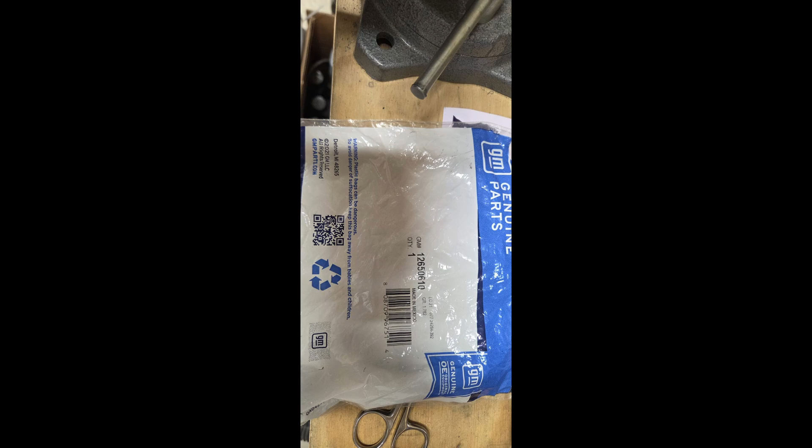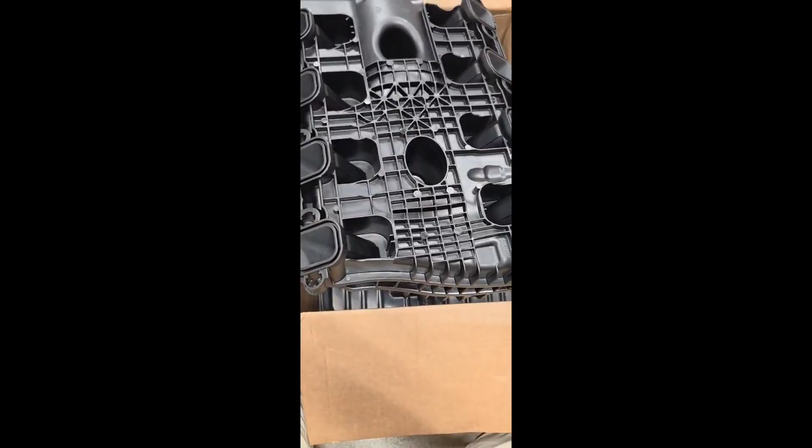The intake manifold. Looks good. I have a 2021 though, so hopefully it works out.

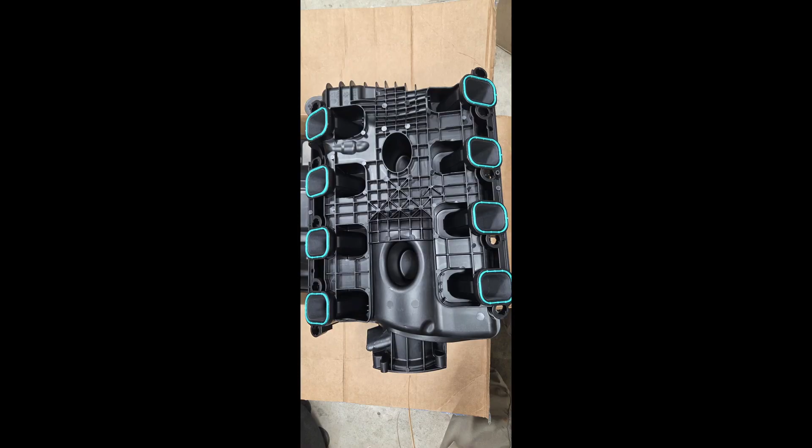Had a little unboxing video. I just hope it works.

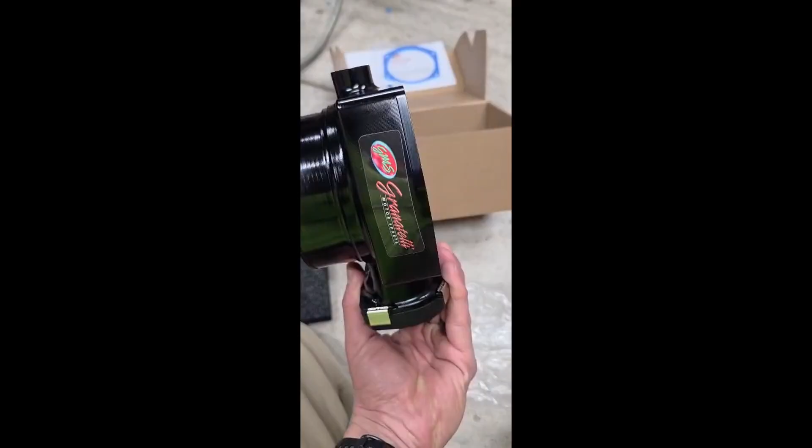Damn, look at this beast. I have a 2021 Silverado, but usually anything from 19 to 21 is usually compatible, but hopefully this is too. This thing is sick.

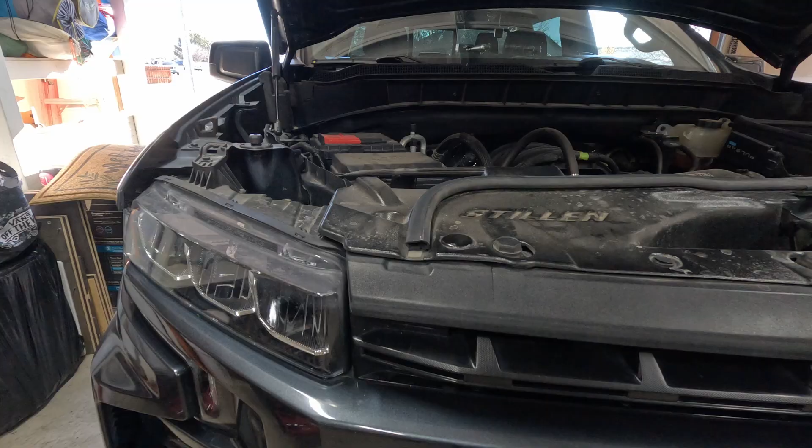But first things first, we're gonna remove the negative battery. Well, the negative terminal.

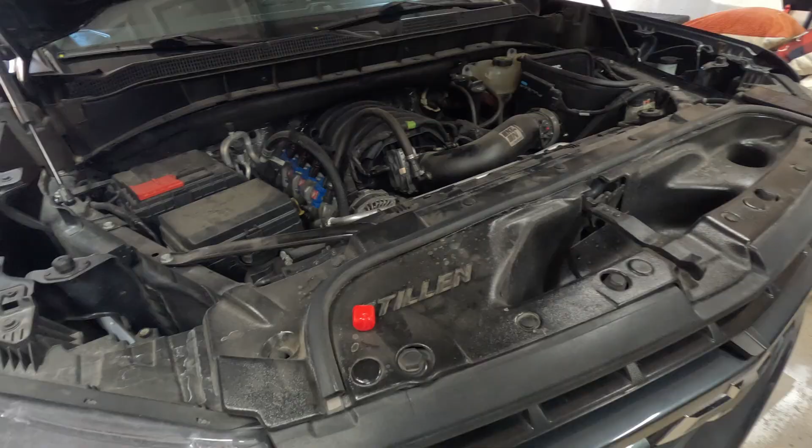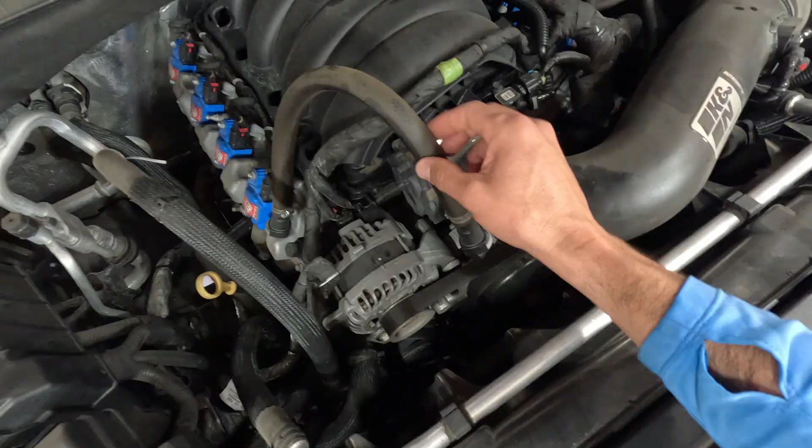Be a little tough to see, but next thing we're gonna do is start getting some of the intake stuff out of the way. So remove the throttle body, some of these hoses out of the way, start disconnecting these cords, another hose, vacuum line. And we get to the 10mm bolts that are in between that.

Alright, I'm just gonna try to get a little bit of shots before and after. Intake - I'm sorry, the throttle body. Connections on there. But it needs to be clean for sure.

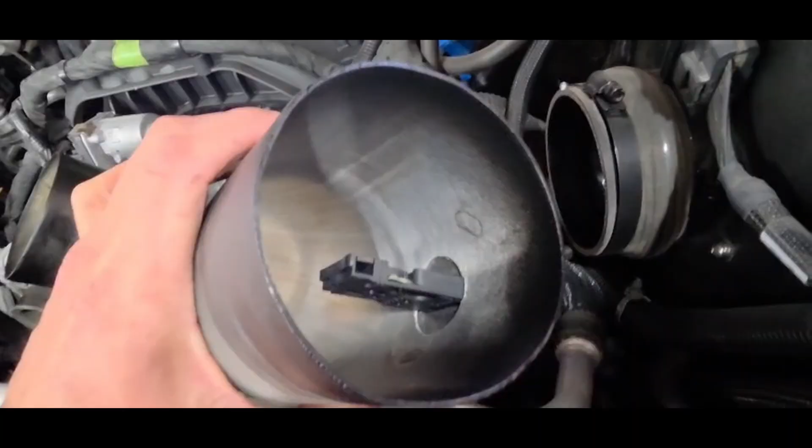Well, my GoPro died, so or the SD card is full. So while I have it apart, I'm actually gonna also spray the mass airflow sensor. It's been a while anyway, so I'm gonna spray that. Hopefully that can get cleaned up while we're here.

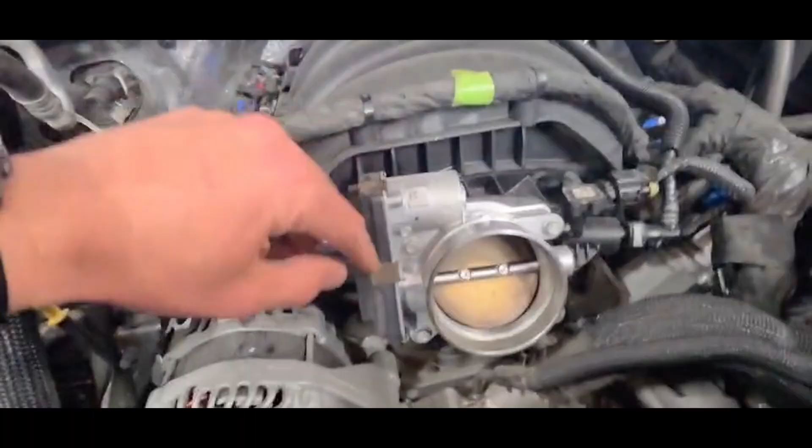I'm gonna start removing some of these plugs out of the way for right now. Then I'll do the throttle body, then get all these little T3 connections out of the way, all around that are holding all these wires to the cover, and then start trying to remove it.

Okay, now I also took off a bunch of these damn clips. Those things suck, especially in the back. See this side? These are a little worse. Trying to get all these. I know it's hard to see, but these are a pain in the ass. They got all messed up, so I'll probably just cut them off. There's another one back there I think I need to get still.

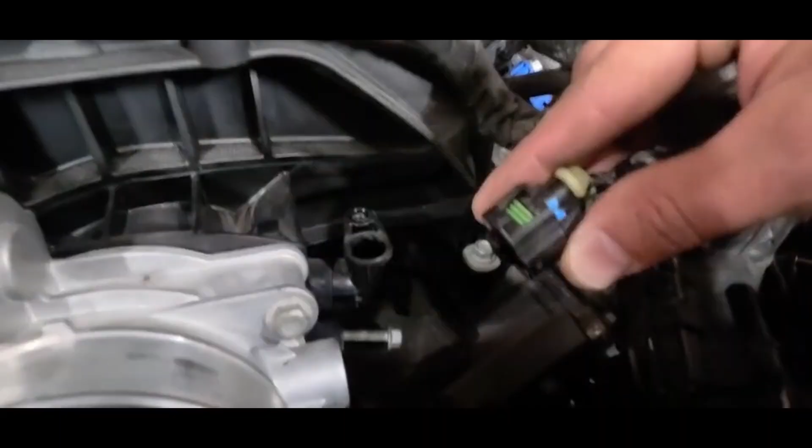And I unplugged a bunch of this stuff to get it out of the way. Just trying to be careful with these. And then that stupid little blue clip broke, the tip of it where you're supposed to pull it out. Of course it snapped. And the one for the throttle body also snapped.

Sucks. Okay, now I'm gonna start trying to go for the cover. So I think there's about, I know there's 2 in the front, and I think there's 2 more in the back for just the cover.

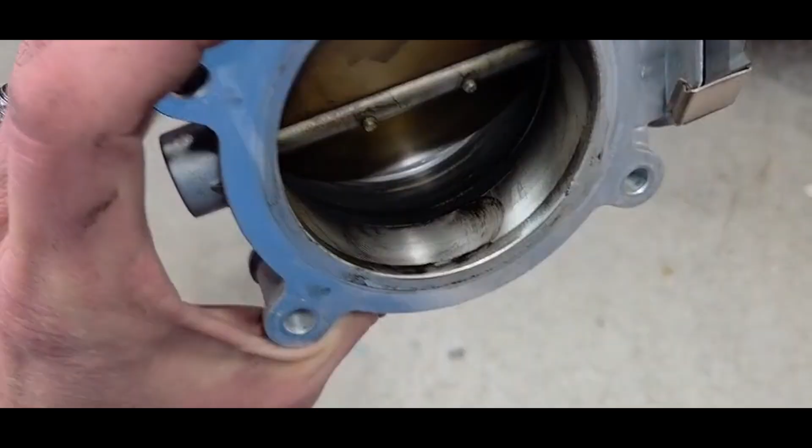I'll double check. My throttle body is pretty nasty too. So you can see all that oil and gunk. Maybe this would also push somebody to clean their throttle body. There's a bunch of nasty in there.

Well, it's messed up and funny. The good thing is I cleaned what I have now. The bad thing is I basically have the cover off. I just have to put everything else, all my stock stuff, right back. I cleaned the throttle body. It was freaking disgusting, so I did clean that up.

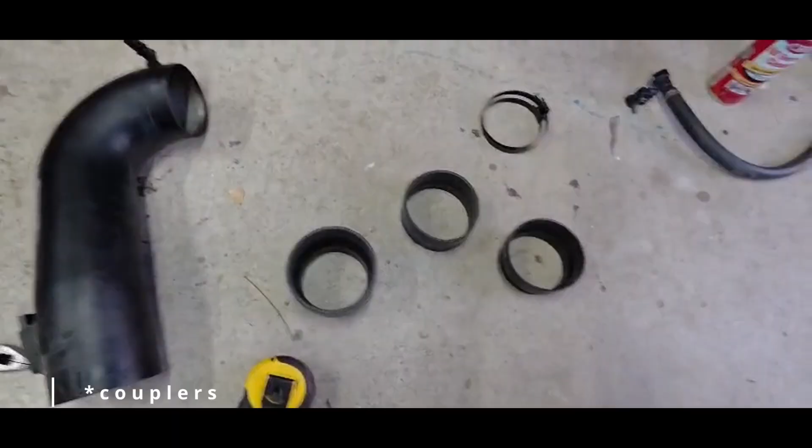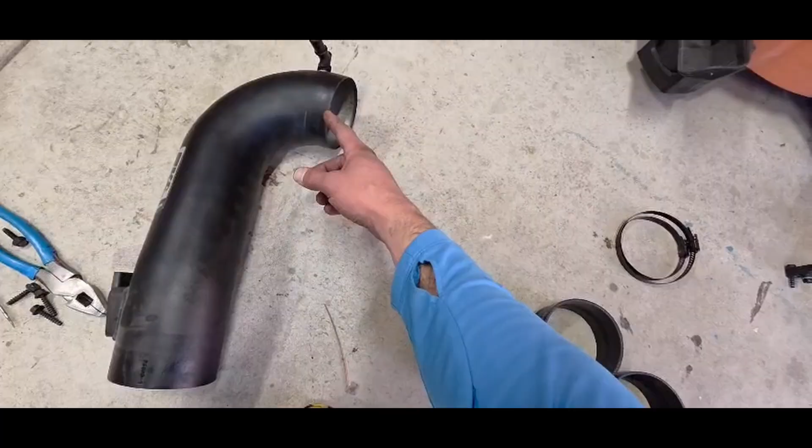But these couplers are messed up. So none of these are the correct couplers. This one is the last one that I ordered, so I'm gonna have to return this one now. But what I actually need is a 4-inch inlet for my intake, and a 4 1/4 inch for the throttle body, because this is 103 millimeters. So I placed an order and it won't be here till another 2 days. So now I have to stop what I'm doing and then go back to this project eventually. An idiot.

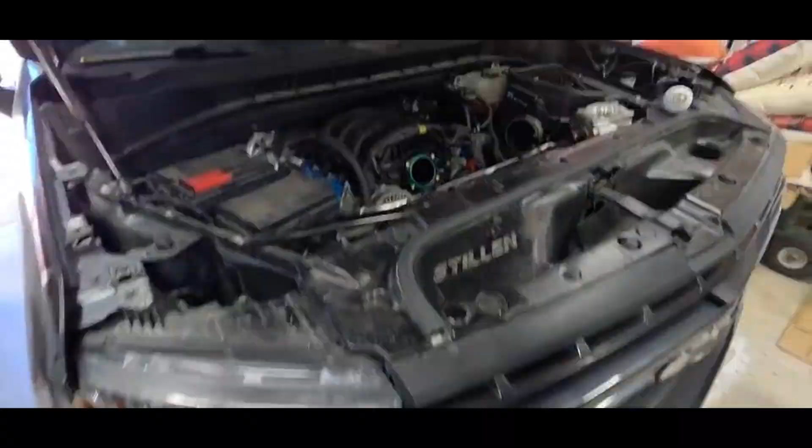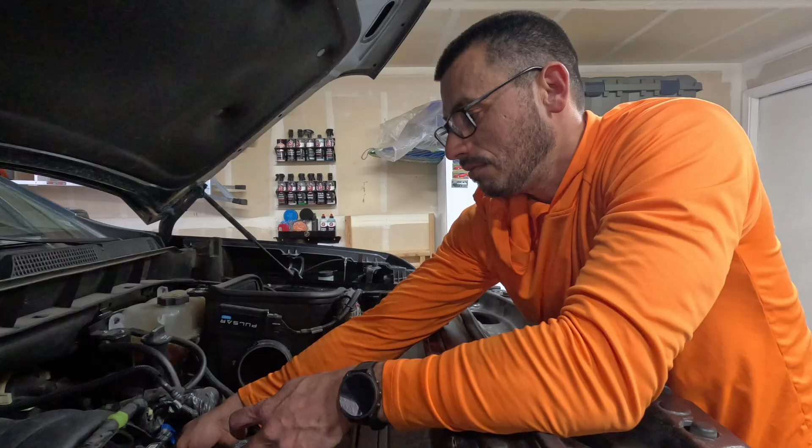Alright, this is the next weekend. Trying to do the project one more time. So once again, I'm trying to get a ported intake manifold from a 6.2 liter Silverado, and then a Granatelli 103 millimeter throttle body, and their spacer or adapter for the throttle body.

Right now I'm trying to go back and disconnect everything all over again. Hopefully I don't mess nothing up this time. Hopefully I got everything that I need, and I got a cameraman this time, so hopefully that also helps.

So like I said, right now I already disconnected my intake tube, mass airflow sensor connection, so I can take out the intake tube, throttle body, and then right now I'm trying to get these wires off, or this little cylinder off. Kind of a pain in the ass, but yeah.

So I'll get that one off, and then I can start removing the cover. Once I remove the cover, then I'm gonna start removing the intake manifold and then clean under there.

Alright, I got some of these other connections out of the way. All these little plastic tabs out of the way. All these little, I don't even know what they're called to tell you the truth, but these little clips that hold these wires in. Took them all off. The ones in the back is more than a pain in the ass. So basically the cover is basically loose, but there's still, I think, 3 or 4 more of these Christmas tree tab things holding it in place.

So I think I'm gonna do what I saw in other videos where people actually took the intake manifold out first and then took that cover off. So I might have to go that same route because it's actually kind of a pain in the ass to get back there. I don't even know if I can reach it at all.

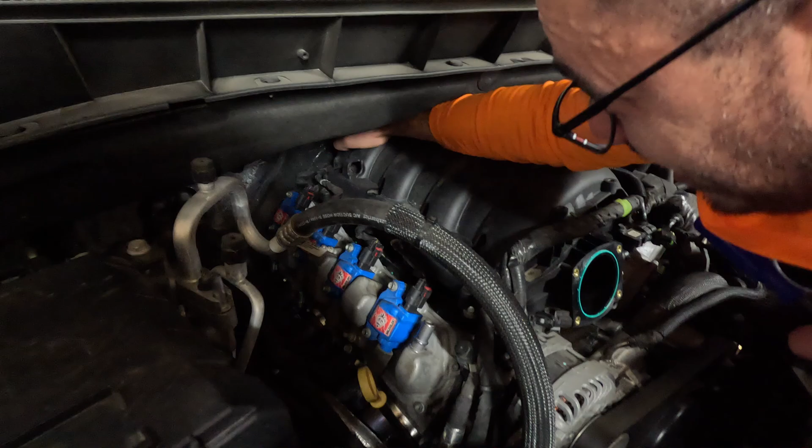And I feel like I'm gonna fucking need it. I mean, freaking need it.

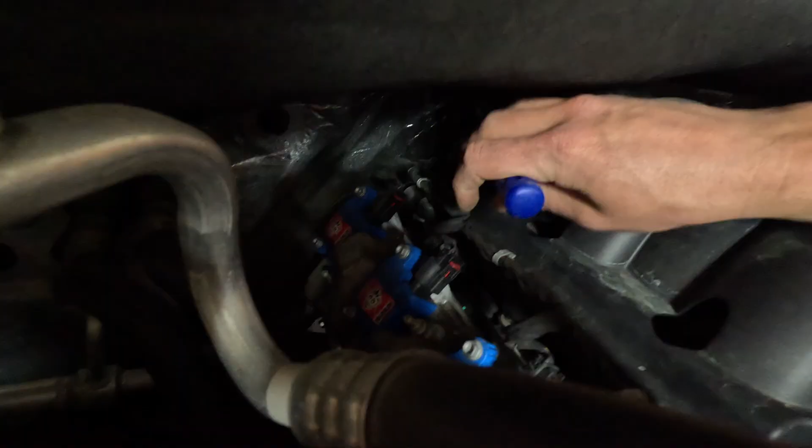Yeah, I don't know about that. I don't think I'm gonna be able to get to those. Yeah, with this little tool, or with this big tool, I should say. I don't even know, I might have to do that first.

Okay, so I finished removing all 10 bolts. The one on the driver's side rear, that was a pain in the ass. I ended up disconnecting the coil pack plug to give me just a little bit more room, and it did help. But all 10 bolts are out of the intake manifold now.

So now I'm gonna try to pull it out. The cap's still on there. The cover's still on because I still can't get to those clips in the back, or whatever they are. But I'm gonna try to remove the intake manifold. Hopefully I don't put anything in the motor when I'm trying to remove it. I try to blow all the dust away and vacuum some, so hopefully nothing goes in. All right, let's try it.

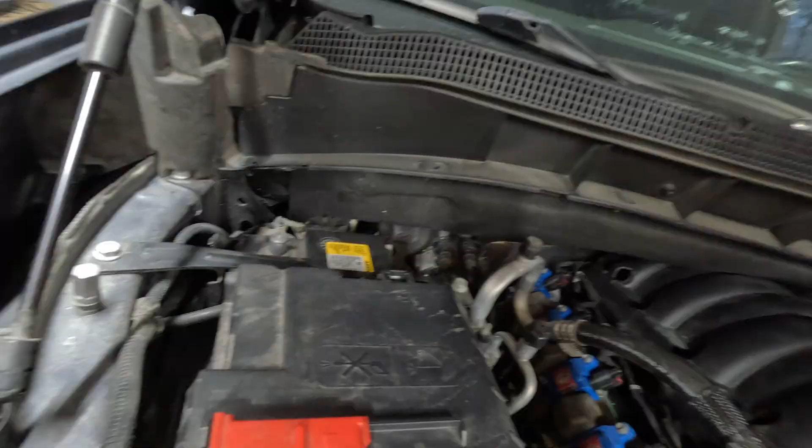And I forgot to mention, the first thing I did was disconnect the negative terminal on the battery. So every time you're messing with anything electrical, don't forget to disconnect the negative terminal on the battery.

Alright, let's see how we do this. This thing keeps getting in my way. Let's see. Let's not fall, let's not fall on video.

So we got the intake manifold out now. I'm gonna try to clean up in there a little bit as good as I can. I don't want anything to go inside the motor.

Shit, I don't know if you guys can see, but these are pretty nasty.

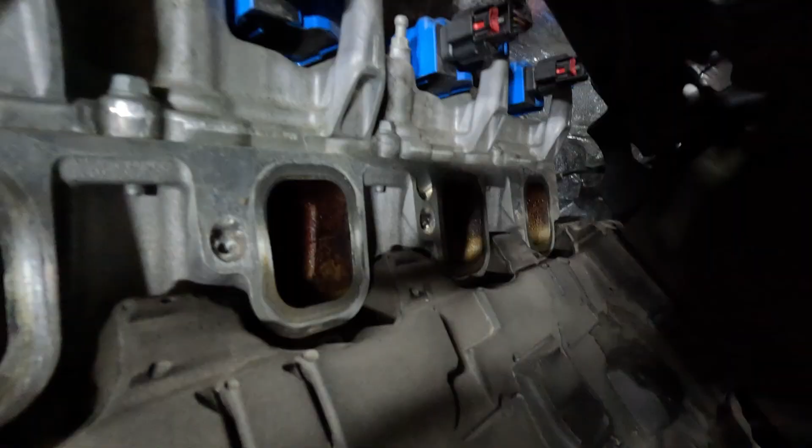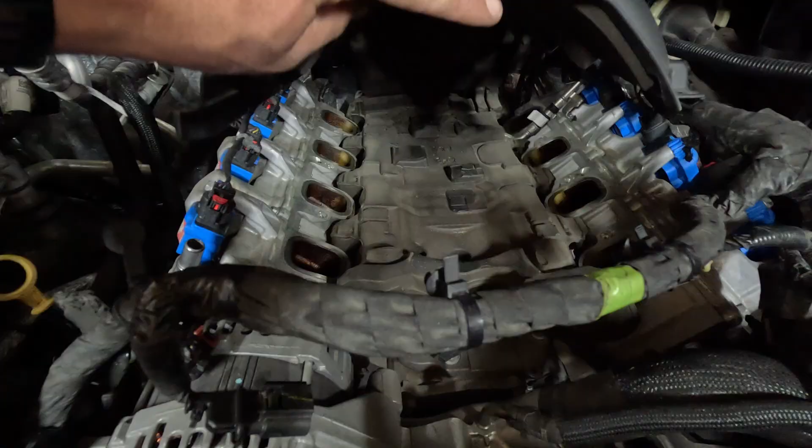But yeah, it was easier with an assistant, that's why we didn't get it on camera. I had to get my son to hold this cover up while I tried to get it out of there. And I did take out all the bolts. I knew it was going to be easier without the bolts keeping me getting it stuck while I'm trying to drag it out or pull it up and out.

All right, now we're going to try to get this cover off, clean that up, and tape those intakes. Let me tape those up so nothing goes in there.

We finally got those stupid clips out. These are a pain in the ass, honestly. I mean, pain in the ass, sorry guys.

But now I'm just gonna take out this little mat cover, silencer, whatever they call it, and then clean it out, try to clean up in there before I install the other intake manifold. Should be pretty quick from now. This was a pain in the ass though, for sure. So we'll just clean everything up in a minute.

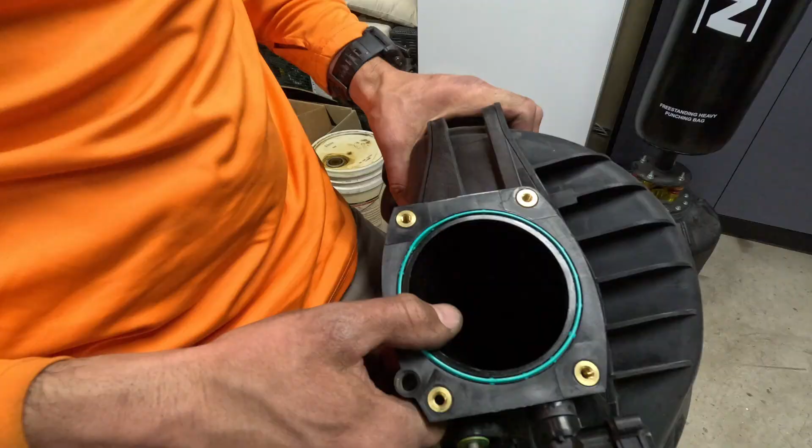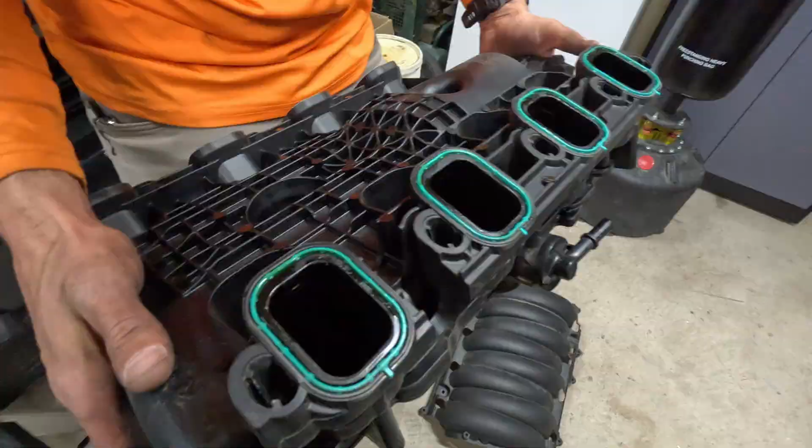And this is my stock intake manifold. Doesn't look bad at all. A little bit of oil around this, around the runners. I mean, it only has like 71,000 miles, so I don't expect it to be horrible. But yeah, this is my original intake manifold, a little dirty. Should do better maintenance or better cleaning around my motor area for sure.

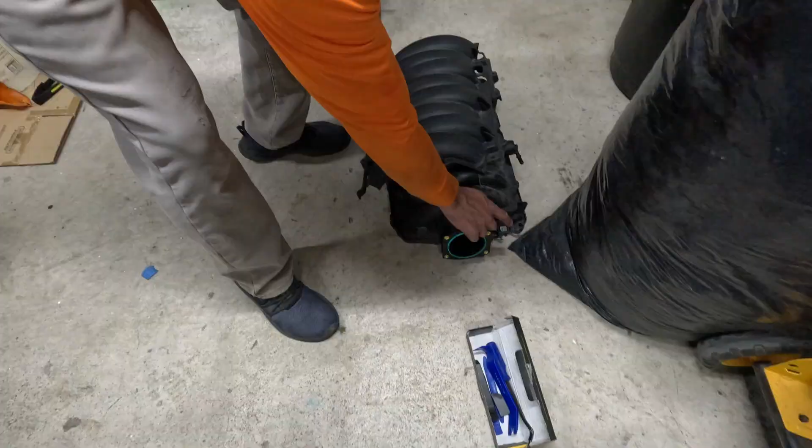Cover. I am gonna have to take that sensor out or whatever that is, the vacuum line hose, whatever.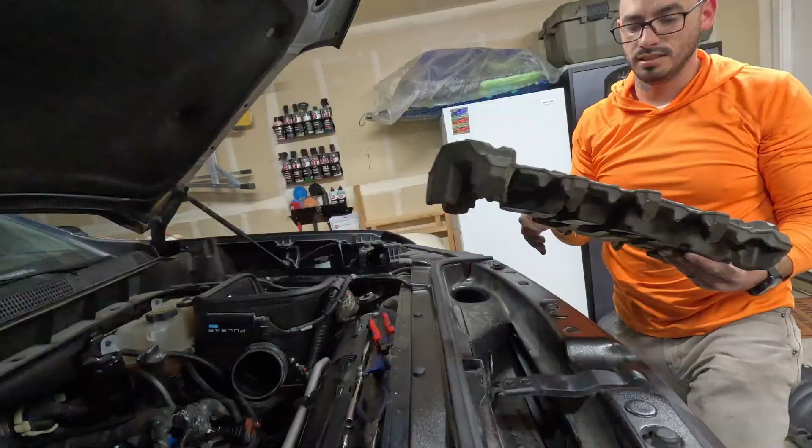Alright, there's that little mat. I'm just gonna clean this off maybe a little bit. We gotta be careful in there because of the fuel lines.

Alright, vacuum these areas up.

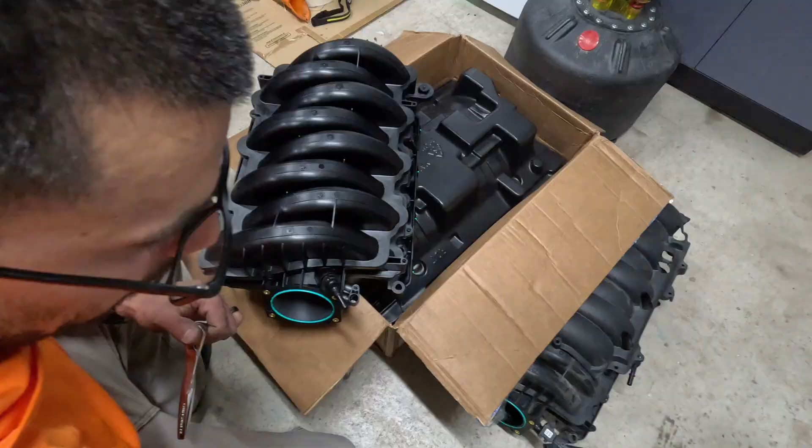Alright, so now this is my new one. This is the new intake manifold that belongs to the 6.2. It's been ported to 95 millimeters, I believe. Even the runners are ported.

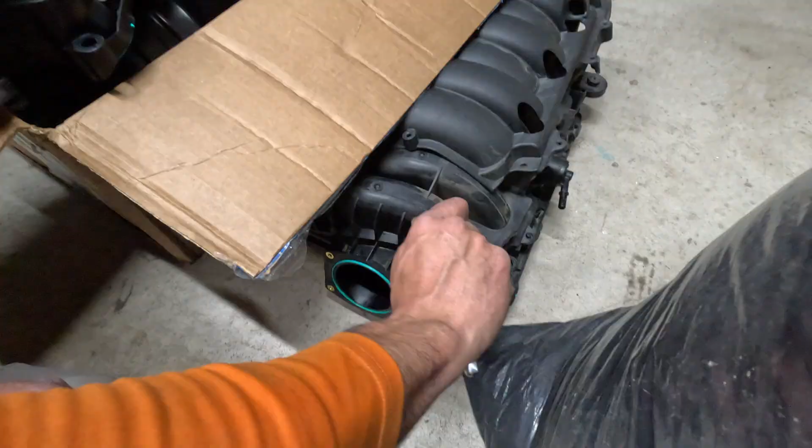Looks nice, all cleaned up. But I am gonna have to put this sensor right here. I'm gonna switch it over to this side.

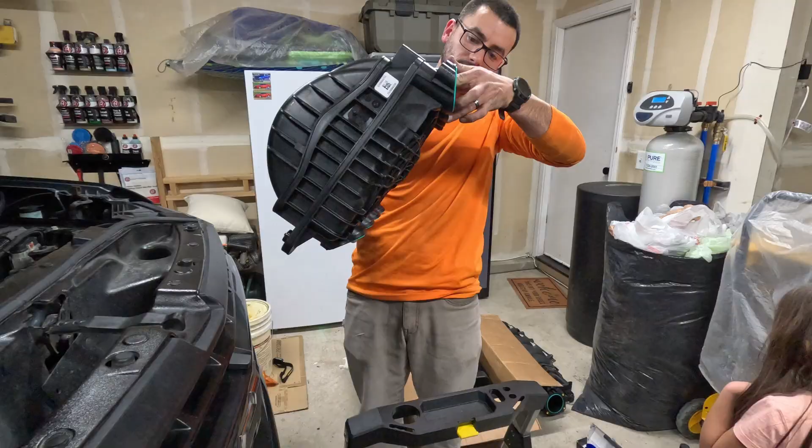Bad boy in there. Hopefully everything goes well.

Dad, why do you have a hole in your pocket?

Oh, that's right, I already installed all the gaskets on here. So everything should technically be good. Technically.

Oh God. Let's see. Ugh.

Put the mat in all the way. Here, I'm gonna take this off and recheck that mat, make sure.

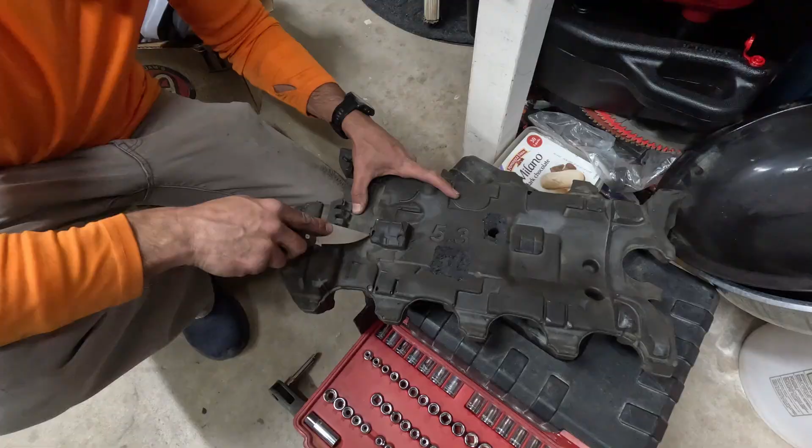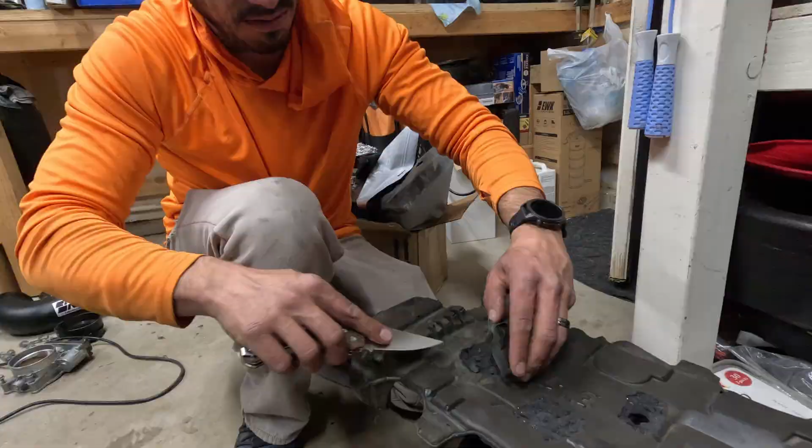Okay, so because of the mat, it didn't have a good seal, it didn't sit in right. If I pulled out the mat, or whatever this thing is for, I don't know if it's for the heat or for the noise, I've heard both, so I don't know what it's for. But these little things are kind of blocking it from sitting in well, or getting a good seal. I'm actually gonna see if that helps.

Oh, wrong way. It's this way.

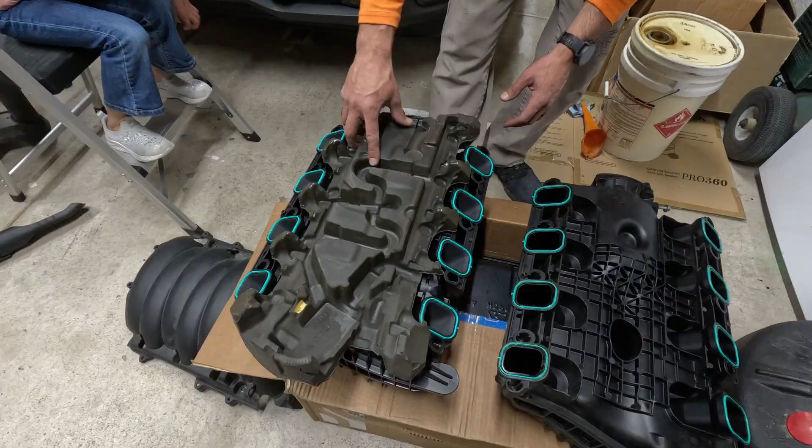So this is the original one, and this one is fine. It's perfect, it sits in really good. This one, still not 100%. It's better, but not 100%.

Dad, actually it might work. It's better, it's the front.

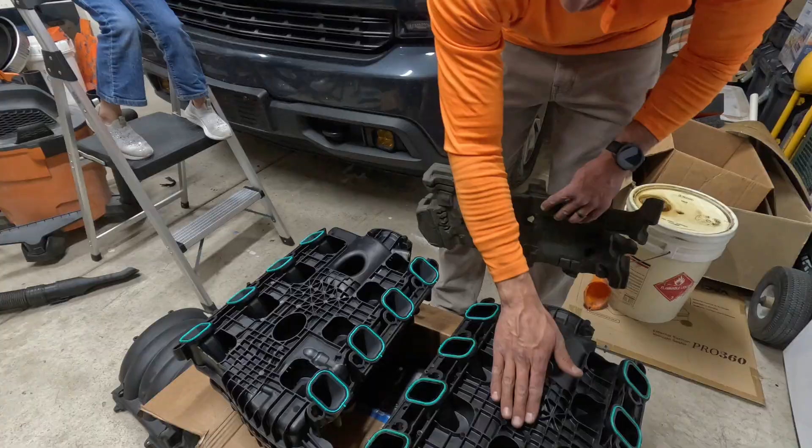The only difference that I see so far are the dips right here, and I think that's why I cut these off. And then right here throughout the middle, this little section, I don't really want to cut into this right now, honestly. Don't want to, but if it doesn't sit right, then I might have to just leave this off, maybe. But I don't know if it's for heat. I don't want to cause any issue.

Alright, so I put the mat back in after I cut those little rubber pieces off. It doesn't feel 100% like it did, but I don't know, maybe once I bolt it down, I don't know if it'd be okay.

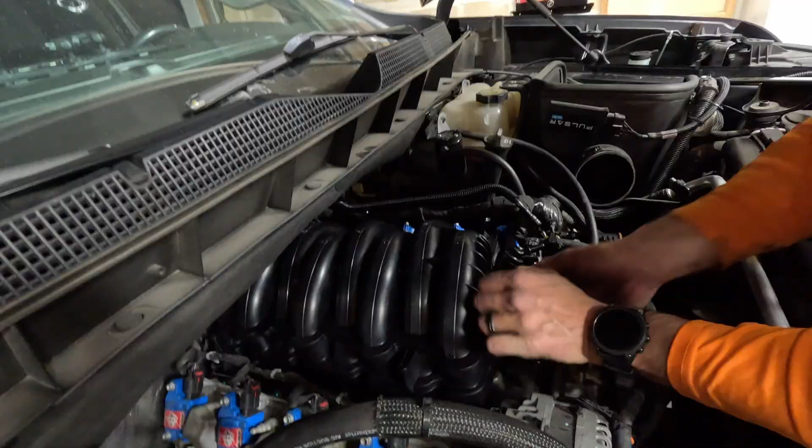I just don't want any leaks. That's my whole problem, I don't want any leaks at all. I don't want to deal with any of that. Once I put everything back on, I want to make sure this thing is nice and tight.

The back feels really good, actually. So now it might be something in the front. And like I said, I want to keep the mat off. I just don't know if leaving it off will cause any issues.

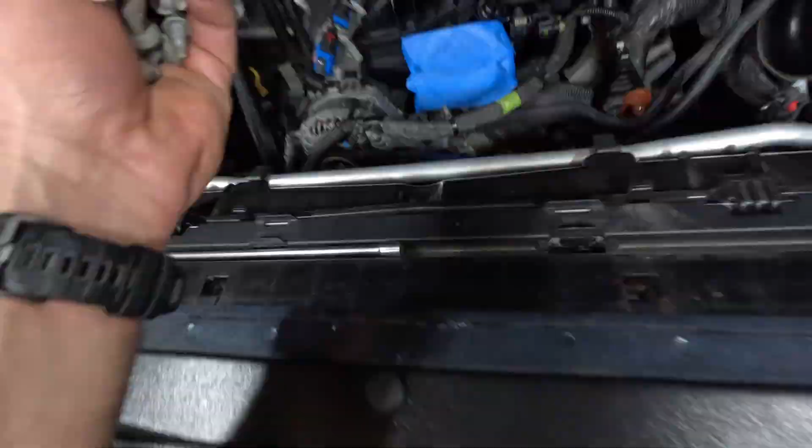Okay, so far I had to modify the crap out of that mat. I don't know if I should leave it off. I'm not too sure, so just to play it a little safe, I mean, it was there, so I might as well keep it on there. But I modified it by cutting the crap out of it, a bunch of chunks, honestly, just to see if I can get it to seal right.

Yeah, so now it feels a lot better, it actually feels a lot more secure. But like I said, I just don't want any leaks. I don't want to put everything back on and find out that it has a leak somewhere. I don't know if I can just keep it off too. I'm not too sure about that, but we'll see.

We'll see what happens. So next step is to put all 10 bolts around and then torque it to spec.

Whoops, I guess I didn't record. So I torqued everything down to spec now, 44 inch-pounds on the first pass, second pass was 89 inch-pounds. I used this schematic that I found online.

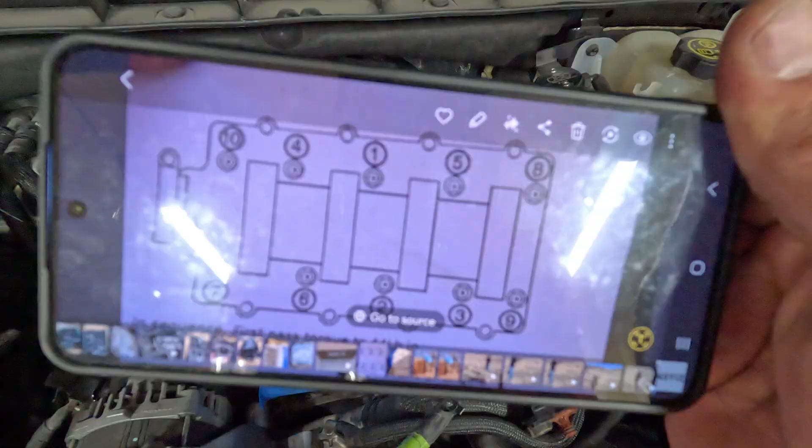Hopefully the glare is not in the way. Okay, let's do this again, battery died. So like I was saying, I used this schematic to get all the torque specs, and also I know what pattern to use.

And now I'm gonna go back and install the intake, throttle bodies, all the connections, the coil pack wire that I disconnected back there, and we'll see.

I also have to do an oil change right after this. And my cameraman's having dinner, so he's not here to help me, so I'm gonna have to be pausing and going.

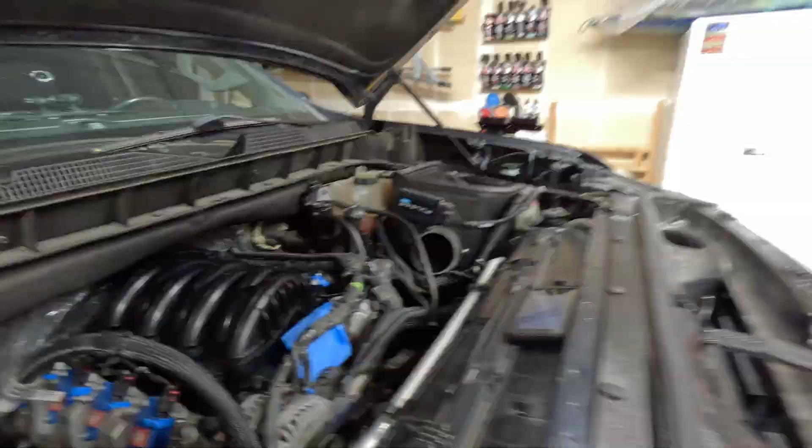And now, put that down because I'm sweating like crazy.

Now I'm gonna finish reinstalling all these wires and plugs like I was saying. So far I just connected this one. I'm about to connect whatever these are. Tell you the truth, I have no idea what they are, but I'm installing them.

Shit, I think it's too long. Okay, connected the alternator back on.

Like I said, my coil pack back there, these things, whatever these vacuum lines, vacuum hoses, whatever they are. About to install the throttle body.

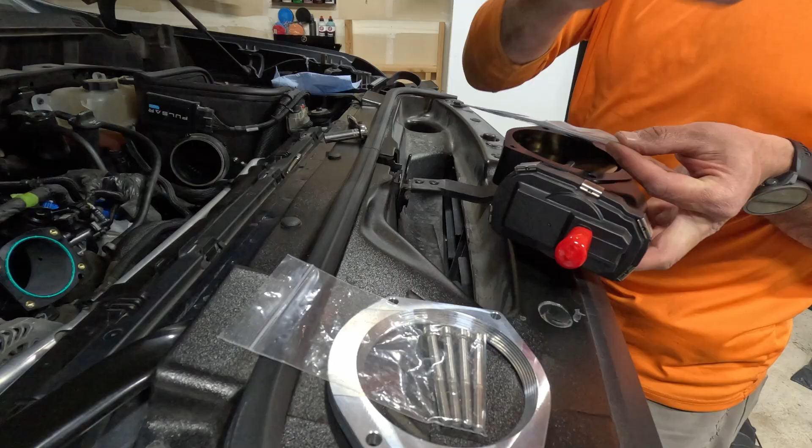Yeah, okay. 103mm throttle body from Granatelli. The adapter, the longer bolts, and then I got the gasket for this. And this time I ordered the correct, oh my gosh, what the hell are these called right now? I guess I'm getting tired.

The couplers, oh my god, it's called the coupler. Well, edit that out.

Ooh. Oh shit, that would've sucked.

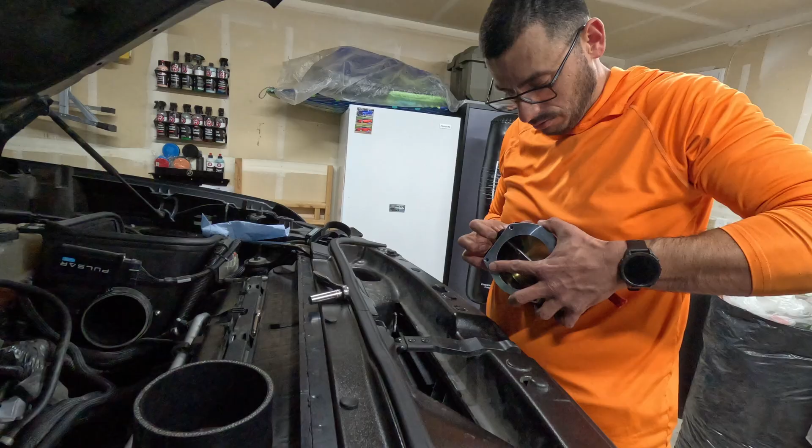Oh, like I said, there's the gasket and then the throttle body, but it's like the adapter one, also from Granatelli.

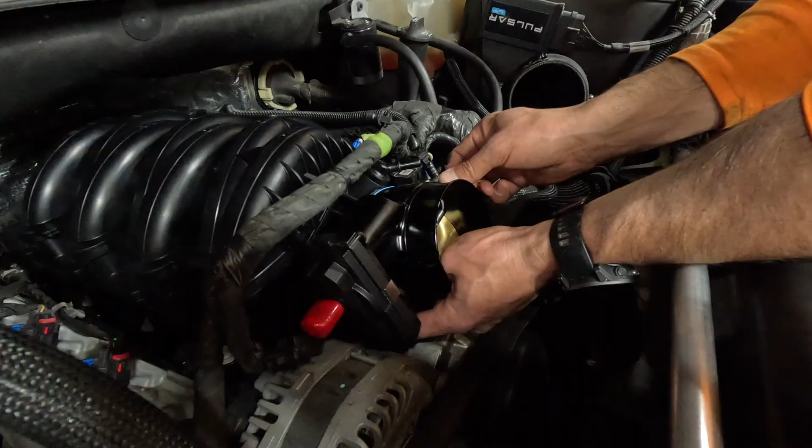Oh, let's see. That's not for now. Oh shit, I can't see it. Okay, there you are.

What do I need to do with the tool? It's not enough room in there. Can't really get it with my fingers. Yeah, I need a tool. Alright, so ooh, don't lose those. Can you give me a tool? Oh my gosh, it's hella hard to see.

Oh, this thing looks clean, huh?

Little cover, connect the throttle body.

My little clip broke last time I tried to take this off, so that sucks. As long as it doesn't fall off, it's all good. Kind of. And then coupler. Well, this part is also tough, bro. I think they still need something a little bit bigger than this one.

Tube fits. Now intake.

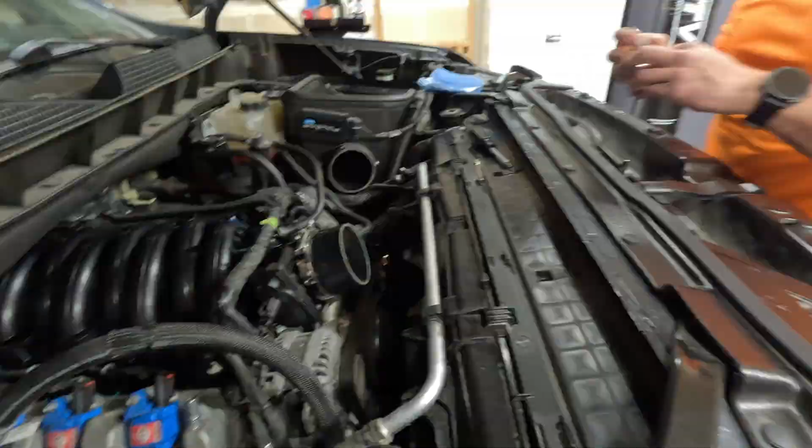Alright, so ran into another issue because of the bigger throttle body, the spacer is pushing it out more. This doesn't fit 100%, I just hope it doesn't cause any issues either.

It's just pushing the box out a little bit more. Like I said, hopefully it doesn't mess anything up there. Let's see if we can tighten this bad boy up. Okay, looks like it will work.

Okay, alright. Okay, it's in there pretty alright anyway, so. I don't like how that looks.

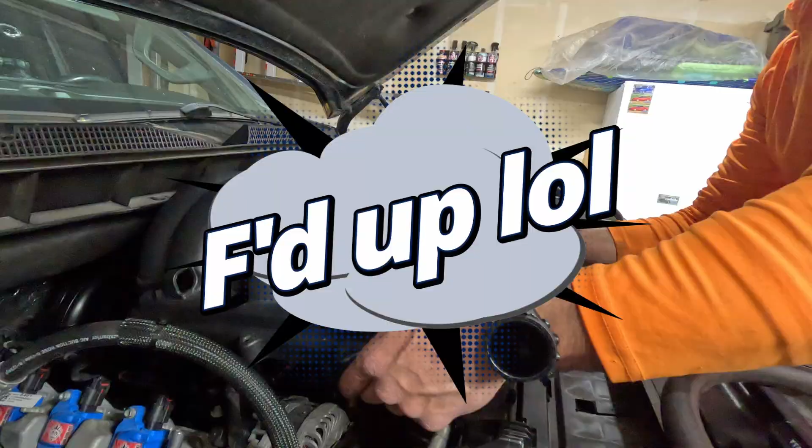That's the last thing I know how to install, this tube. Is this the vacuum line or vacuum tube? Oh shit, I didn't even... I guess I'm not gonna install it if I can't get it inside. Yeah, I sure don't want to mess up any wires right there. Okay, well, I messed it up.

Leave that part. Okay, there's that. Everything else is plugged in. Intake, and the wire in the back. All these hoses are good to go. Okay, now just reconnecting the battery. I also have to do an intake.

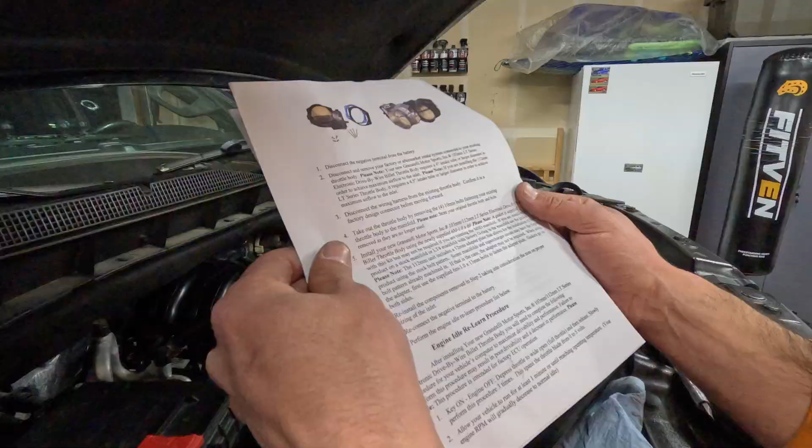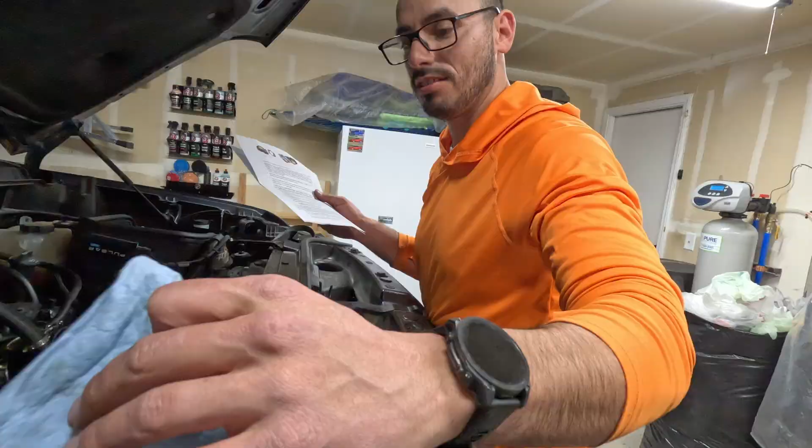Granatelli recommends doing a relearn for your throttle body. After this, as soon as I get a chance, I'm gonna go get it retuned, since I already have a tune on it and it's unlocked. The reason I'm doing this is because I can't afford a supercharger right now, so this is my cheaper route for now, until I'm able to get a good one.

So a few things I had all wrong. I kind of forgot that because of the spacer and how big this throttle body is compared to the other one, I wish I would have done comparisons, but I didn't. My tube didn't fit well, so I had to push my box out of the way just so the tube could fit. Even now, I don't feel like it's 100% in there, so I'm gonna have to figure out what to do, or if I need a custom tube. But we'll see.

Okay, I tried to double-check to make sure I got everything connected and put on. I forgot to put the cover on before putting the intake in, so I'm gonna leave the cover off for now until I decide later to redo this, or if I have to take it off. Hopefully I don't, fingers crossed, but the cover's gonna stay off for now. Everything should be back on. Now I'm gonna put the negative back on. This should be the last step, and then the throttle body relearn.

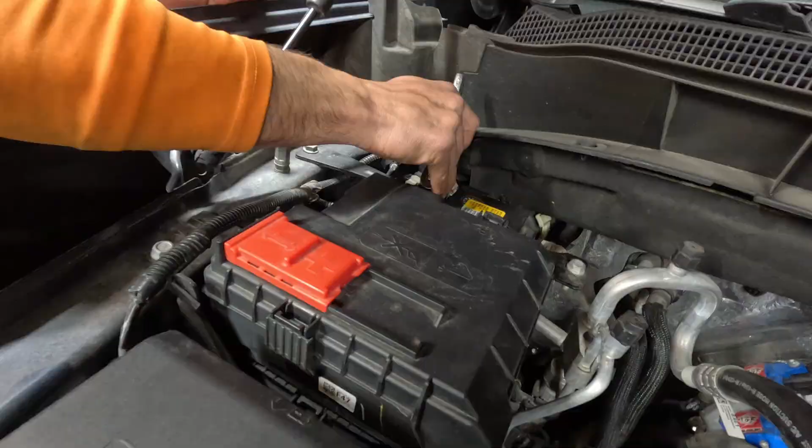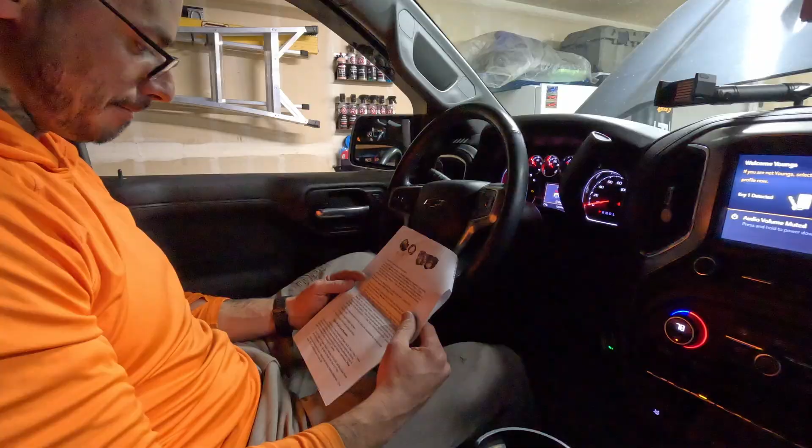Okay, I'm gonna do a little throttle body relearn now, what Granatelli recommends. So it's on the on position. I'm gonna press the throttle to wide open, full throttle, three times, and then release. Slowly perform this procedure three times.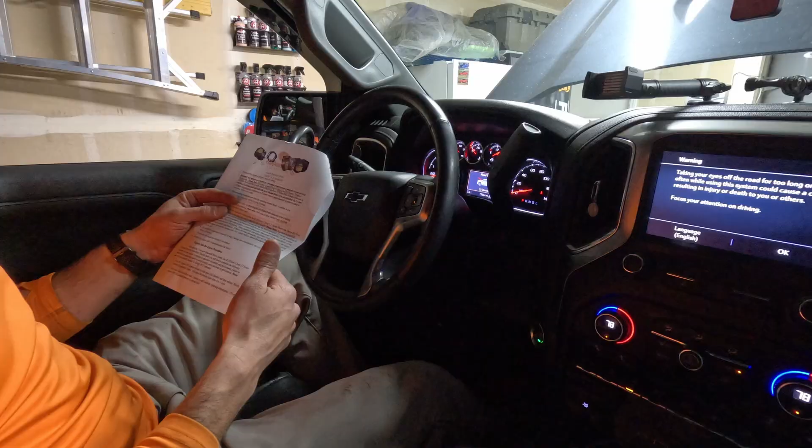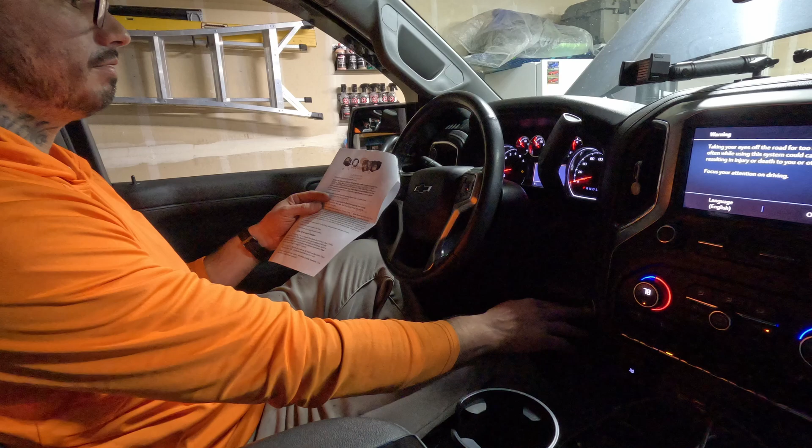Here's 1. 2. 3. Okay, I'll turn it off. Actually, I'll just turn it on now. Let's see.

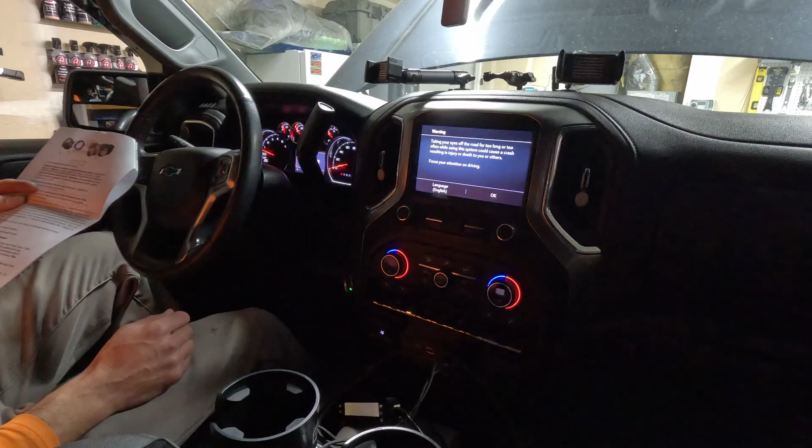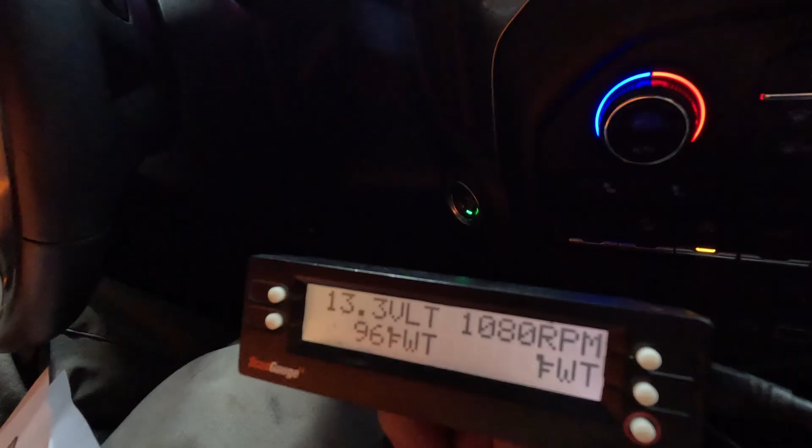So my truck's been off for a while. Oh, thank God, no check engine light on right now. I know it's gonna idle a little higher since it's been off. Right now it's idling at 1,080. It's already idling a little funny, so we'll let it run for a bit.

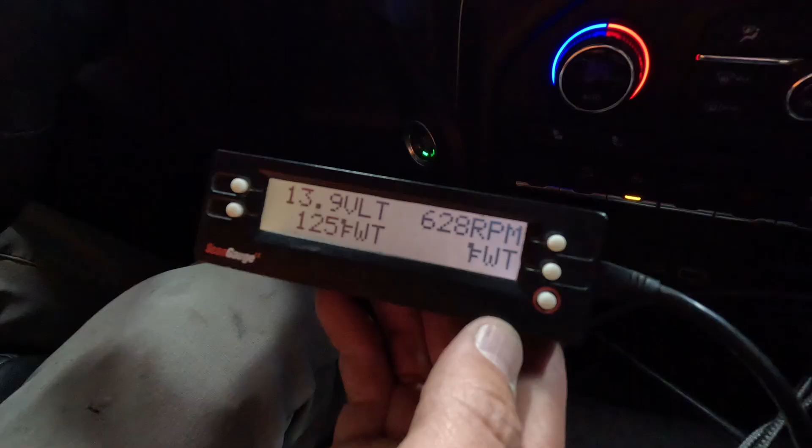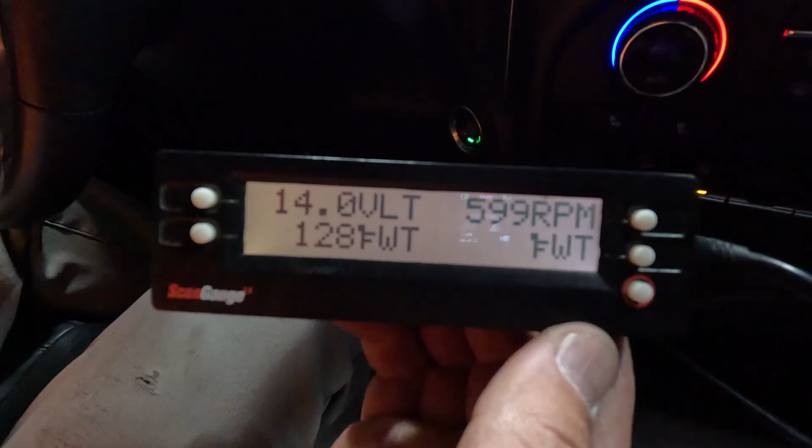Now I gotta make an appointment to get another retune for this. When my truck warms up, we're gonna go for a little test drive, and I want to see how it feels on top of that. So we'll get back to you guys in a bit.

Truck's been off for a few hours, so right now it's still warming up. I gotta do an oil change, but now I might have to wait till tomorrow. It's kind of late, my wife is gonna kill me.

Do a quick little test drive, hopefully everything is good to go. I know my idle's gonna be a little different just because it's gonna need a little bit of a tune for sure. Close the garage.

Okay, well, like I said, thank God no check engine light, but we are gonna go take it on the test drive. See how it feels, see how it performs. So far it feels good.

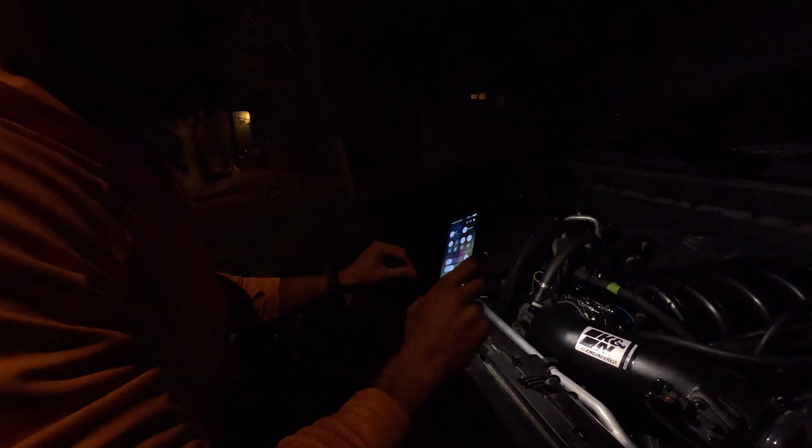Went for a test drive, but something kind of feels weird, and I hope it's not my transmission. I don't know what the hell that was, but something's not feeling right. So I guess we'll get back to you guys in a few days with some updates, or I'll post this video and see what happens. God willing, I didn't do anything to mess up my stuff.

Alright, this is the morning after getting that intake manifold and throttle body installed. I had to do an oil change, and I wanted to do it early so I could hear the actual cold start. My neighbors are gonna hate me for sure, but let's see.